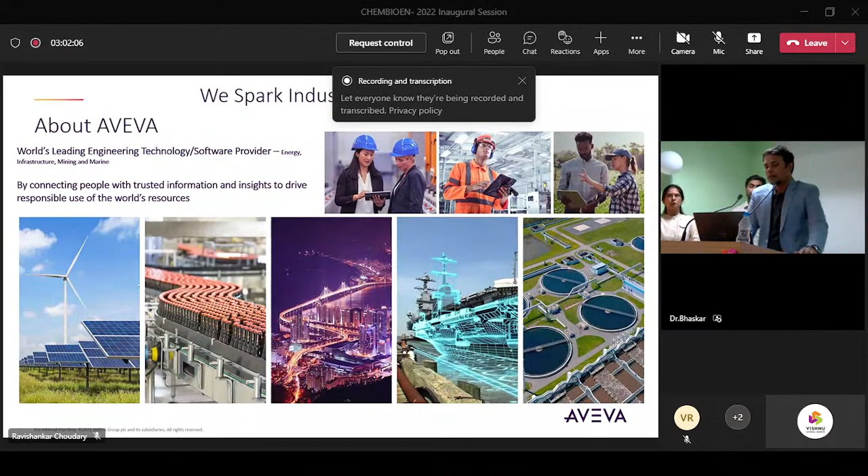So Schneider Electric had performed a reverse acquisition of AVEVA, where we got merged with Schneider Electric. Then onwards, both the giants have been working together, and I think recently in 2017 or maybe 2019 timeframe, AVEVA has acquired OSIsoft, another world leader in the historian database of several industries. So we all together now is where we are here in AVEVA.

With our unique solutions, products and agile technology, we have our presence in 49 of the top 50 chemical producers, all of the food and beverages companies, power industry, manufacturing, oil and gas, infrastructure. We work for Naya Raipur, a smart city. We have delivered our technology and innovation to come up with that smart city in Naya Raipur. We also have our presence in the water industry.

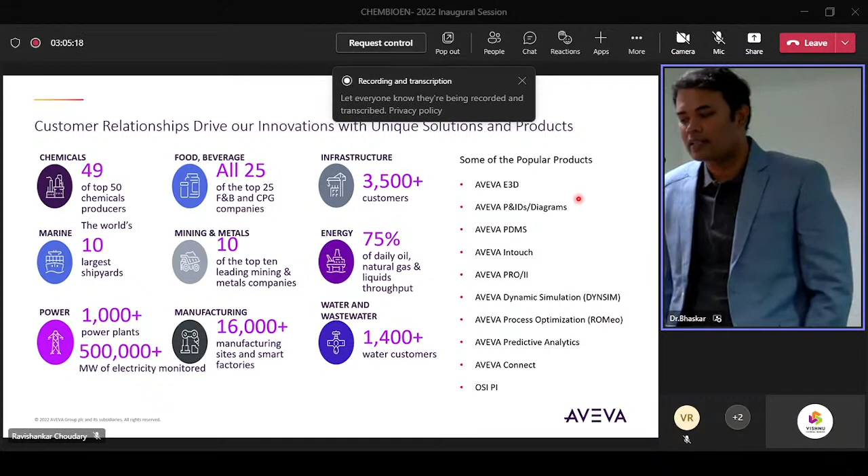Then we have AVEVA Predictive Analytics. This is an interesting one. We have heard about AI and ML terms, right? So this particular product actually has ML algorithms in it. We also have AVEVA Connect, which is a cloud-based solution, and then OSI PI, which we already talked about.

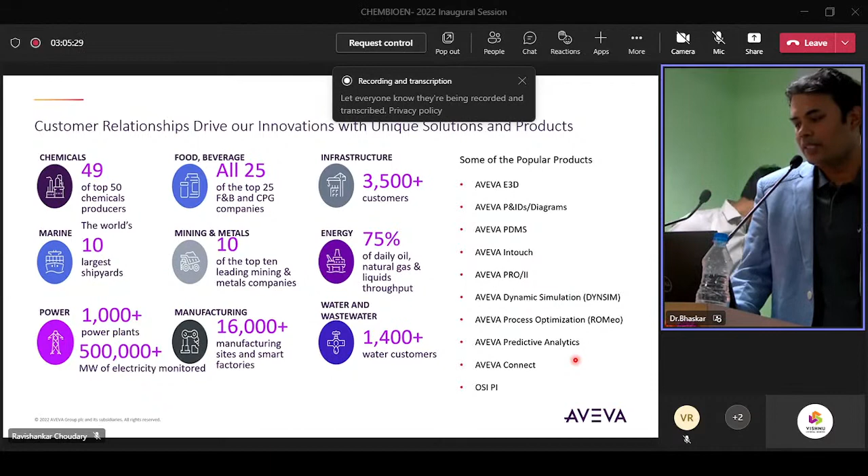Okay, let's go into process simulation now. I would like Anil to continue from here for a few slides. Yeah, so as you mentioned, we are into modeling and simulation, at least our department in Hyderabad here.

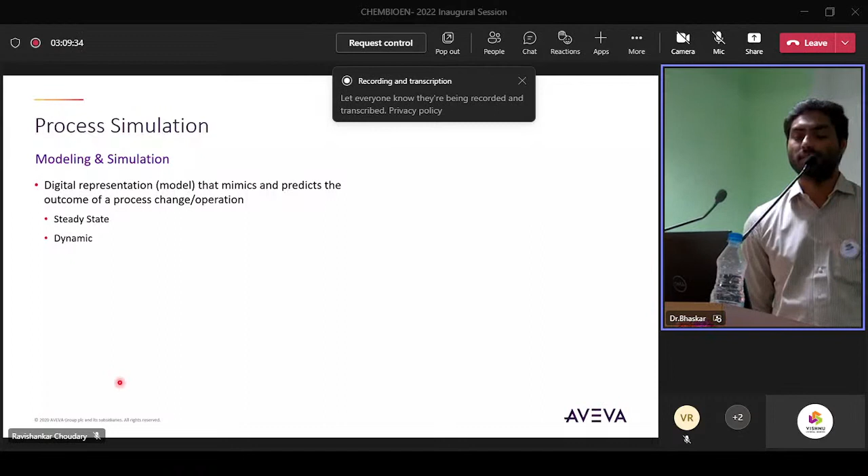So what is simulation is basically a digital representation of the plant. To teach or train an operator, they need to have interaction with the plant, right? They cannot do things directly by going and sitting in the DCS. That's where things go wrong, many mishaps happen, and that leads to accidents. So these simulations are the digital representation of the plants. They mimic all the plant activities, and that provides input to the simulator. There are two types of simulators: steady state and dynamic.

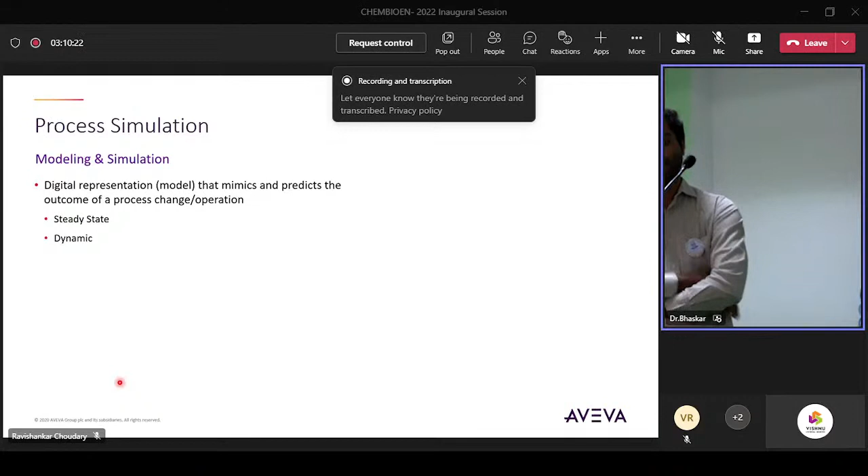And the next one is dynamic simulation, ADS. We call it ADS, now earlier it used to be DYNSIM. This is the dynamic simulation software which is used for training the operators. We'll come to that when we go to that particular section of DYNSIM.

And the next one is the APS. This is a very interesting software we have come up with recently, like in the past few years. We have been working on it, our R&D team is working on it. This has features from design till plant implementation. Till that level, they can do various activities in that.

And the next one is ROMeo. This is the one which most industrial people must be aware of, because this is the one which they will use for the majority of refineries, petrochemicals, and other industries. They use this software to optimize their production so that their profitability will increase.

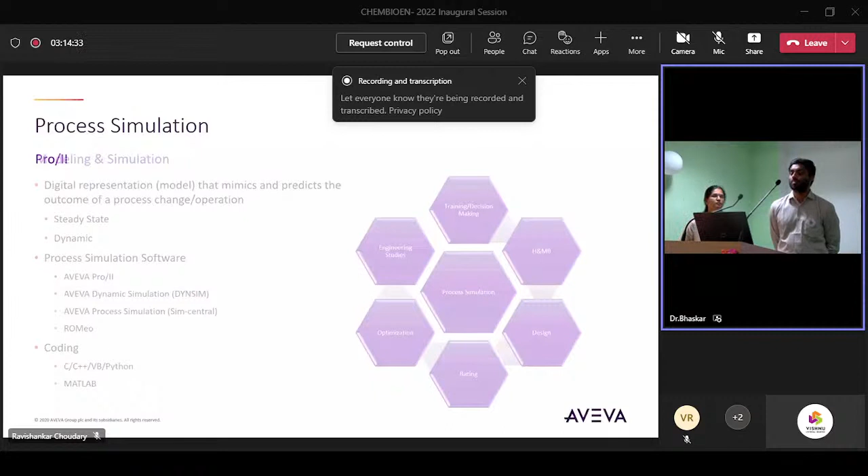Yeah, and here if you see the simulation can be used for different fields, like HMB - heat and material balance. This is the primary thing when anyone wants to start a plant or industry. They decide based on the output they want to produce and what products they want. When they contact EPC or the licensors, so what they give is specific to that industry, and they'll provide a customized HMB solution specific to that plant, with all the inputs like raw materials and the rate of raw materials defined.

These can be developed in the PRO/II, because that's what I mentioned when I said a steady state simulation. So this is where it will be useful. I just want to add here - you must be going through heat and material balance subject, right? So probably it's straightforward, because you'll have a small drum or maybe a column in order to perform heat and material balance there. But imagine a plant, it's huge, right? So that can be easily established using these softwares. I hope you are trying to relate the importance of chemical engineers in this field.

So that's about HMB, and also the second one you can say training and decision making. This is one of the important applications we have with our simulator - this is where the dynamic simulators will come into picture. So majority of the accidents will happen due to lack of training, because over the period of time the operators will come and go. Especially when I joined in the industry, there were operators who are not that skilled in terms of education qualification. So they used to feel very awkward, and they were reluctant to share their information - what they had was the insecurity of their job.

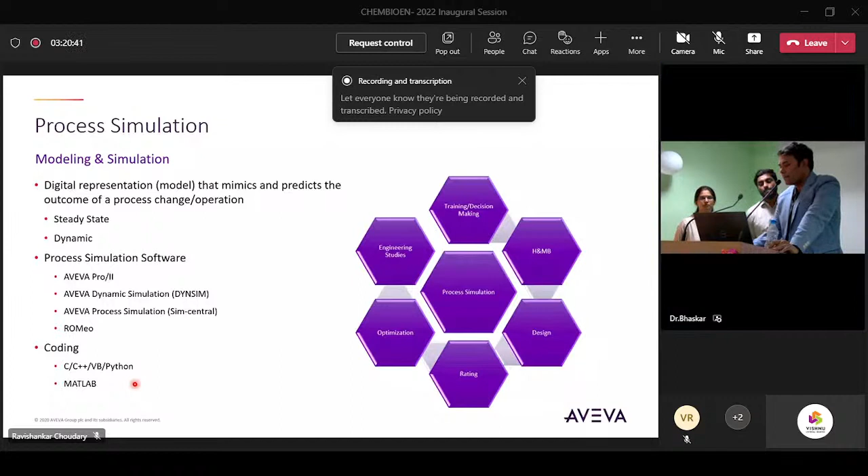Out of the 4 simulation products I mentioned earlier, this is the first one, which is a steady state simulation. This simulator takes into consideration all the first principles of chemical engineering, and tries to get a solution. The basic things are conservation of mass and conservation of energy - these are the 2 things it takes care of.

And it won't consider the volume. Let's say there is a big plant and you are giving certain input, and ultimately to get the output, there is some reaction time or lag. But in the steady state simulation, if you give the feed with proper specifications and initialization values, it ultimately reaches the final solution and gives you the product. So it's basically independent of time - it won't consider time as one of the factors. To put it another way, there is no accumulation. It's a steady state simulation - time tends to infinity, and no accumulation there.

This is one of our old products, actually being used in several industries, predominantly in refining and petrochemical complexes. This Pro/II has different unit operations like drums, valves, distillation columns, and heat exchangers.

If you'd like to tune things or get to know the kind of heat duty - or if you know the duty and one side of the process, say you need to raise the temperature from a certain value to another, and you know the other side heating medium - then you can calculate how much fluid is required to heat that. Those things can be easily obtained from this simulator. Another thing is you can extract a lot of reports from it, and easily analyze what is happening, like by varying certain parameters, how things are changing.

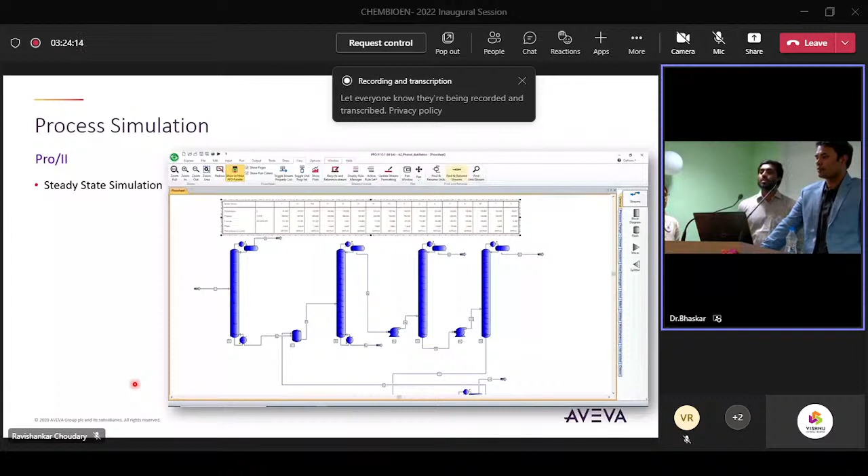Let's say if you have taken a shutdown and you want to replace a certain heat exchanger or something like that, you cannot just simply open the heat exchanger when there is hydrocarbon in it. That is hazardous. So what they will do is basically nitrogen purging, and before doing that, they need to take off the liquid first because they need pressure to push down the liquid.

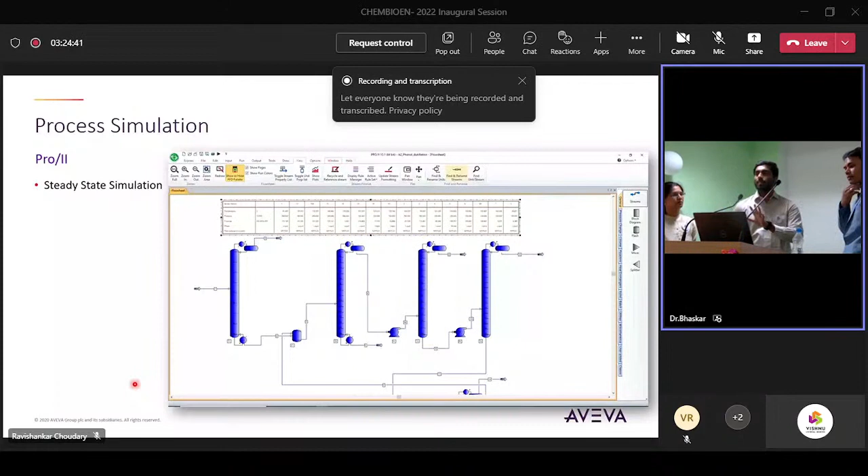So let's say you have some small system, I'll take one distillation column with overhead reflux drum and everything. If you want to drain that and give proper volume and all, we'll get to know how long it really takes in the plant. In case of emergency, if you want to prepare in advance for what is happening there and how long it takes, you can do the things from here itself, like draining, how long it will take, how much volume we are putting into the flare, or if there is a backup vessel, how much volume we are taking into it. So those things can be easily studied here.

This software can also be used for engineering studies. So the earlier one was mostly used for HMB, and this software can be used for engineering studies, and rating also can be done here.

And the other important thing is the OTS, the operator training simulator. This is where training comes into picture, because what you're seeing there as a drum has the actual dimensions, the real length and diameter. If you want to maintain a certain level of material in that, you can see how much it can handle and how long it will take to pump from that drum to the next thing. So those can be studied and understood from here. And in most of the interviews, the major...

Finally, the screen is updated. So this is the DYNSIM interface, and Anil was talking about this equipment here that actually takes the actual dimensions of the original equipment. So this has the accumulation term into consideration for the simulation.

I think there is a lag in updating the screen.

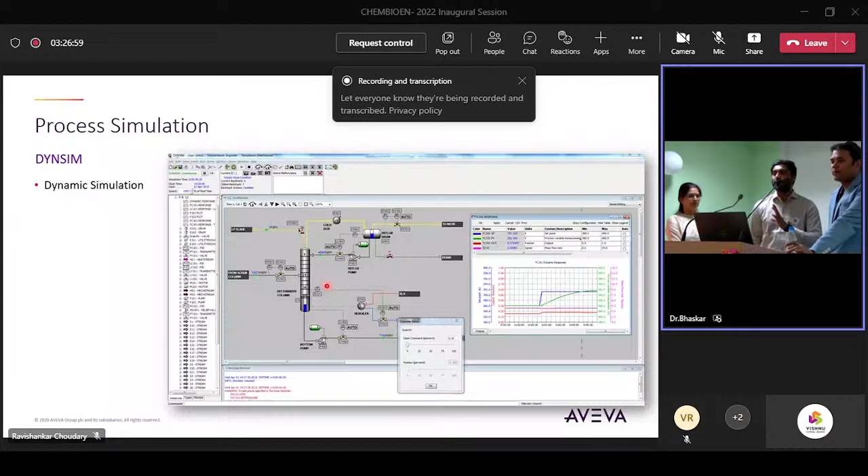So this can be operated in different modes. One is simple simulation mode, that's where you'll build the plant in the software, and the second one is data reconciliation. So data reconciliation is nothing but, let's say you have all the inputs - if there is any heat exchanger, you are giving one stream with certain flow rate and temperature, and there is another stream going on the other end, and there is a heat exchange between those two.

So to find out, let's say you need a certain outlet temperature to get the required duty, these things can be tuned, and with this software you will get to know what is the heat transfer coefficient required to get the heat exchange between those two mediums with a given flow rate and given inlet and outlet temperatures. So data reconciliation is the phase - that's where it happens.

You'll give some known inputs, because temperature, pressure, flow - these things can be measured from the field and will be taken as an input. And there can be some error in this because of measuring instrument error. So those things can be rectified in the input here, and later on those can be used for getting the final output, like unknown outputs such as heat transfer coefficient, etc.

So basically, it also considers the redundancy of the transmitters. In a plant you will have transmitters, but there is no guarantee that you can rely on the transmitter. So for that reason, they have, let's say, 3 transmitters on the same line. If 1 or 2 of the transmitters doesn't work, the ROMeo model plays a role where it reconciles - it can identify what is the error with the instrument and then reconcile that particular heat and mass balance and provide us the results. So again, it can also be used for heat and mass balance and performance monitoring of assets.

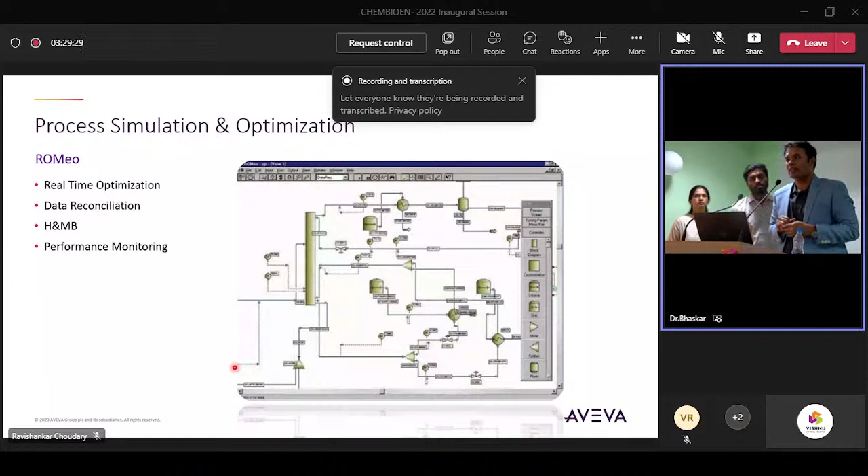Right now, predominantly it is into petrochemical complexes, the chemical industries, and so on. It can also be integrated with our other portfolio, the AVEVA portfolio that we have - the various softwares that we have. It can be integrated as well.

Okay, now specifically into operator training simulator, but before we go into it, any questions? No? Okay.

Now let me connect back to my story that I've told - it was a true story, right? That was a small pilot plant. Imagine I was there in an actual plant - I would have panicked multiple times more than what I was panicking in that particular pilot plant.

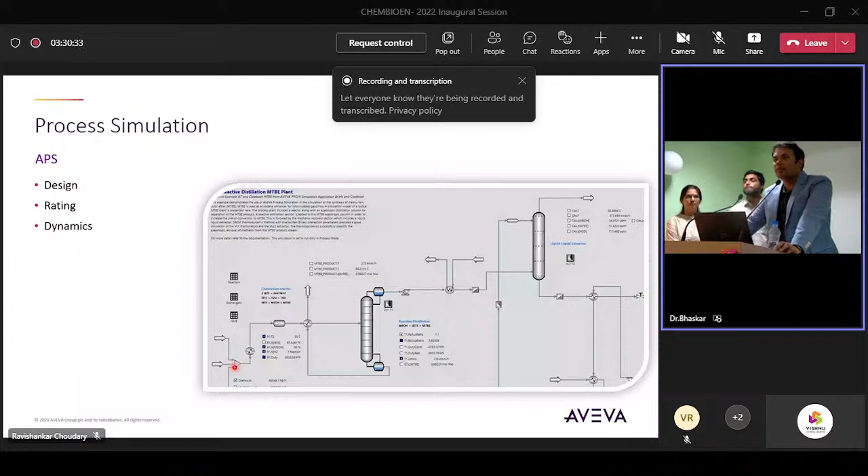So it is essential for new operators to get training on their plant, and that's where our solution, the operator training simulator, comes in handy. So these are our purposes - various purposes of having OTS.

There are two types of operators, as you know - field operator and console operator. So this simulator can be used to train both field and control room operators, basically for efficient knowledge transfer and skill development.

One of our major customers in United States - at some point all of their experienced operators were getting retired. Obviously they needed operator training simulators, so they approached us, and we have been providing this particular solution to them. They are extremely happy and satisfied with the operator training simulators we have installed in the majority of their refineries and petrochemical complexes.

Basically, it can be used to handle abnormal situations and unplanned shutdowns, and avoid unplanned shutdowns, or improve and reduce the time for planned shutdowns. It can lower the risk of accidents - once the operator is trained, it can lower the risk of accidents, increase operator awareness, basically improve his skills and readiness to operate the actual plant.

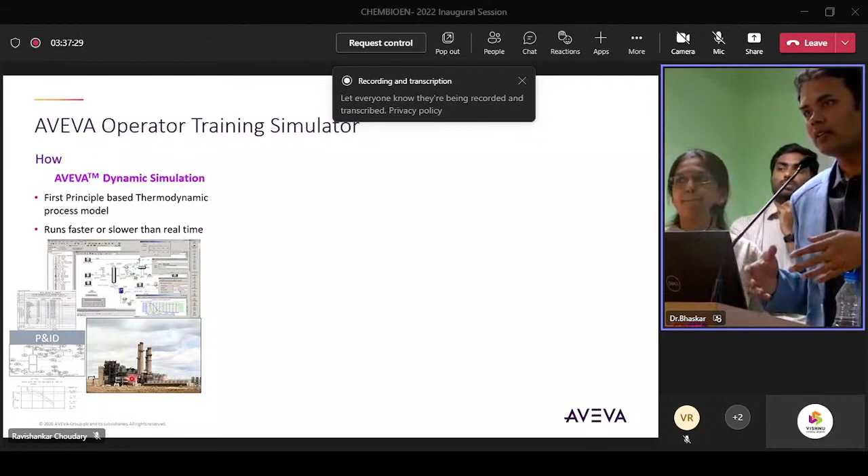And the next one is HMB, which is very much important to do the simulation. This is the data which we use to validate the model which we have built. So basically this real plant, right, whatever, let's take a CDU, starting from the battery limit, the tank, the storage tank, then the feed source drum, then the pre-flashers and distillation column, and then vacuum distillation column, and all the light ends part of the crude distillation column, everything including valves and instrumentation will be simulated in our DynSim software.

Okay, the AVEVA Dynamic Simulation, it's a rigorous thermodynamic based software which can simulate any sort of complex problems that we have in the industry.

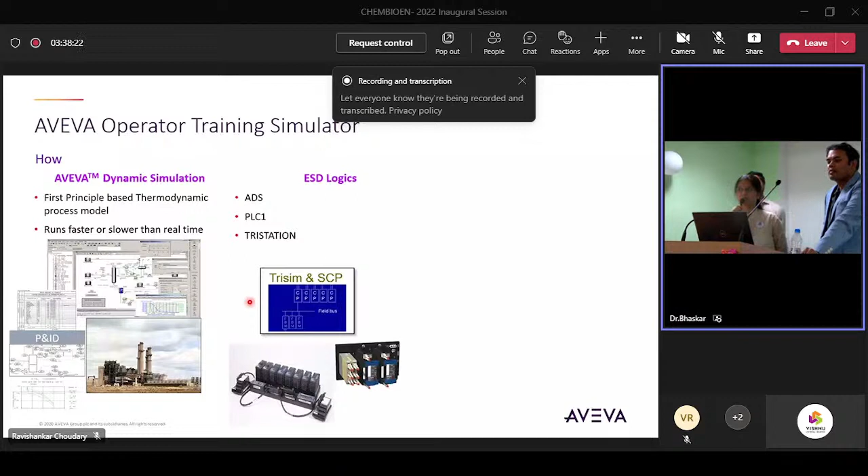Once we build the model using the data which we collected from the client, we try to match it to the HMB, which is nothing but the steady state condition of the plant. Once this is done, we do basic dynamic testing, and then this will be integrated with ESD logics. It is nothing but emergency shutdown logics, which is meant for the safety of the plant.

So if there is a column and for some reason the liquid level starts coming down, you cannot operate the pump for a very important reason. It can potentially cavitate, right? So there the emergency shutdown logics play an important role. It trips that pump at that point when the level is low. So this is one of the examples.

So basically the process model that we build, which is the virtual plant, that will be integrated with ESD, and that's done using TriStation software. This is also software that Invensys had. And we can actually implement the logics even in AVEVA Dynamic Simulation as well. So that's how the actual plant or the virtual plant will be integrated with emergency shutdown.

The model along with the logics, then it will be integrated with DCS. DCS is nothing but distributed control system. It is computerized control of a process plant. So here we have different DCS like Foxboro, Honeywell, ABB, Yokogawa, and so on. And again, Foxboro is a proprietary software.

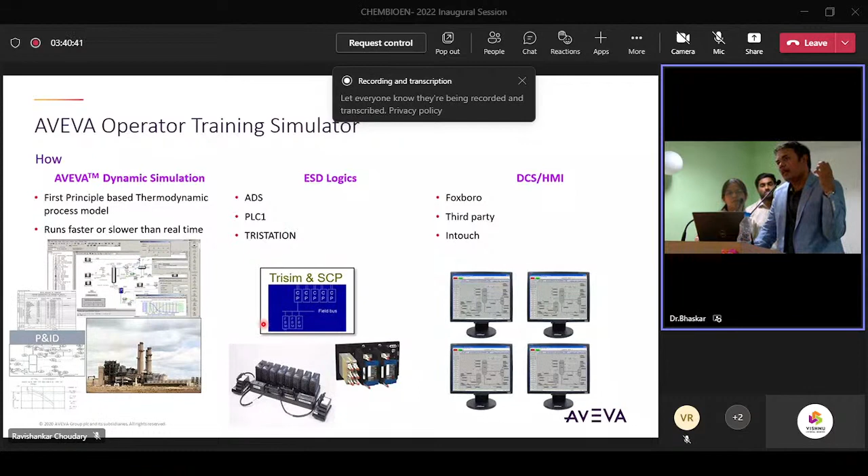Okay, so they exactly feel the plant in this solution. So they basically have all the dynamics involved in the plant. The field operator, he will have his field operations. The control systems and the control systems or simulation will be done wherein I've explained how the DCS will be integrated. So the control room operators, the console operators, will be trained on their actual system itself, right?

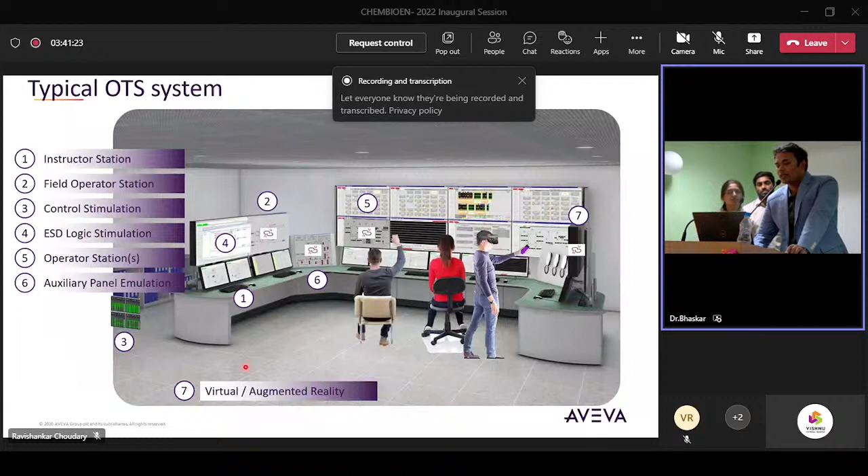And finally, this is an addition to OTS, which we'll talk about again - it's virtual or augmented reality. So basically we have goggles, and once you have the goggles, you can feel as if you're walking in the plant. So this is the 3D part of the OTS.

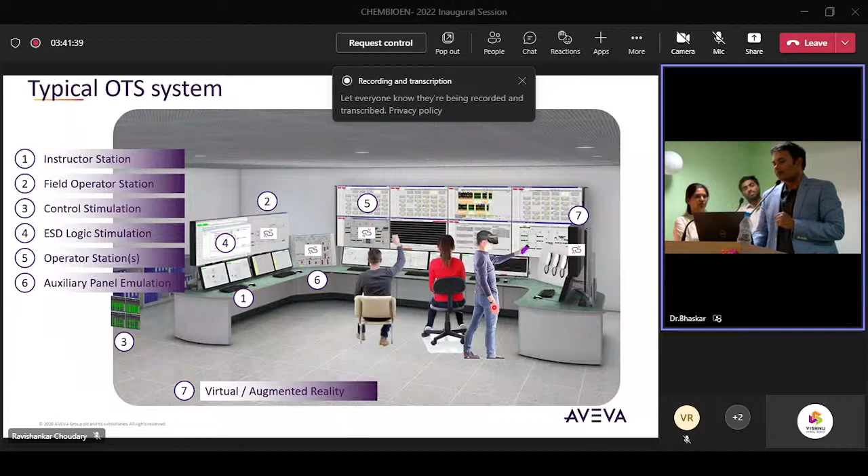Okay, so let's move on to emerging technologies, which we have been working on and started delivering to several customers. We talked about OTS, right? Now we have this immersive training system, which is essentially the extended or virtual reality that can simply be plugged into the OTS, and this entire system will now be 3D OTS, wherein both the field operator as well as the console operator will be benefited out of the system.

For Nestle, this is where I think we have delivered the XR system for them. That was in India. This is another technology, the solution is AVEVA Unified Engineering.

We also call it digital twin because we have a central database wherein the PFDs, P&IDs, and the 3D design developed by AVEVA E3D can all be integrated together with the process simulation software, whatever you have heard - APS, AVEVA Process Simulation, PRO/II, DynSim, and all. These can be integrated, and it's a cloud-based solution that will be used in the entire plant life cycle, from design to operate and optimize.

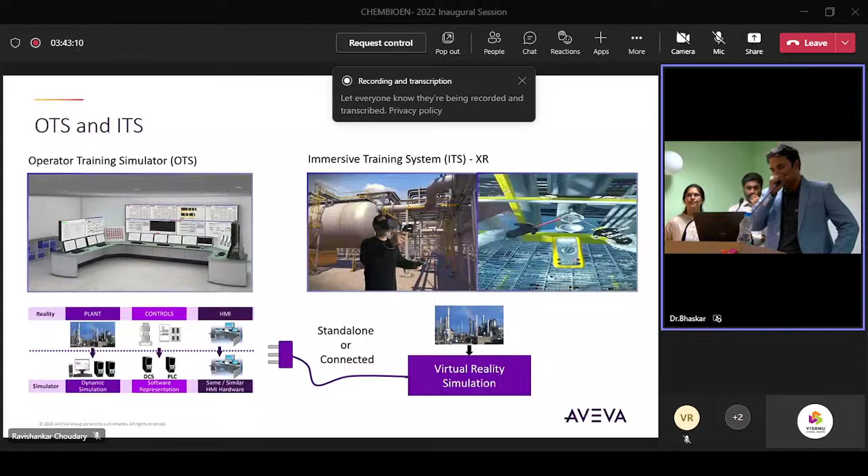So AVEVA Predictive Analytics and AVEVA Process Simulation together - this is a software which involves machine learning algorithms, so artificial intelligence comes into the picture wherein historical data is utilized. This software can be integrated with OSIsoft PI or any other historian databases in the market, and pattern recognition is done by advanced machine learning algorithms that we have.

Potentially, this pattern or machine learning algorithm will help predict the possible or potential asset failure. And the asset in this case can be a compressor, a gas turbine, a steam turbine, or a distillation column, and so on.

So with AVEVA Process Simulation, we can configure the performance calculations, like calculating the polytropic efficiency of a compressor, or the heat rate of a gas turbine. These will be the parameters that go into the AVEVA Predictive Analytics software. The machine learning algorithm will be trained, and then it can be used to predict the potential failure of the asset. Futuristic - this is something we are currently working on with a major customer in the Middle East, and we are quite excited about it.

So after hearing all these things, do you think I should still go through this role of chemical engineer? I want one of you to actually explain to us what is the role of chemical engineer, at least in process simulation. Anyone wants to give a try? Otherwise I'll pick one of you. No one? There was a guy who said he is interested in automation. Can he at least? Yeah.

It might be that most of the time we are simulating here, but the main thing we are trying to simulate is the actual plant. So the basic requirements, as you said, energy and material balances will be carried out by a chemical engineer, because someone from IT or software department can simulate, but they won't have knowledge of material balance and energy balance. That's going to be the main role of the chemical engineer there.

Perfect, perfect. So basically, we have universal presence, right? You go to any industry, a chemical engineer is needed there. He can design a plant, he is involved in the operations. There are several industries out there, there are various roles in industries. One of such roles is a process simulation engineer.

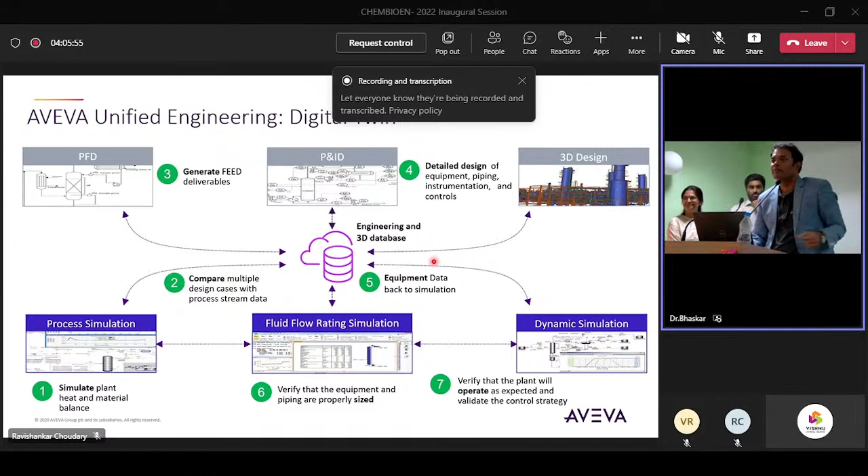Okay, so that's all we had for now, for today at least. I hope the session enlightened some of you, or maybe most of you, and it was helpful, and we believe we have met the objective of this session. Thank you, thanks a lot.

Thank you for sharing how Aveva was formed, and for giving us awareness about how OTS, Operator Training Simulator, works, and how Radhika ma'am explained how it was started and all. It was a very informative program, and it's kind of cool that we got to know you can just put on 3D glasses and know what is actually happening. So technology keeps us wondering all the time. Thank you for that, thank you sir.